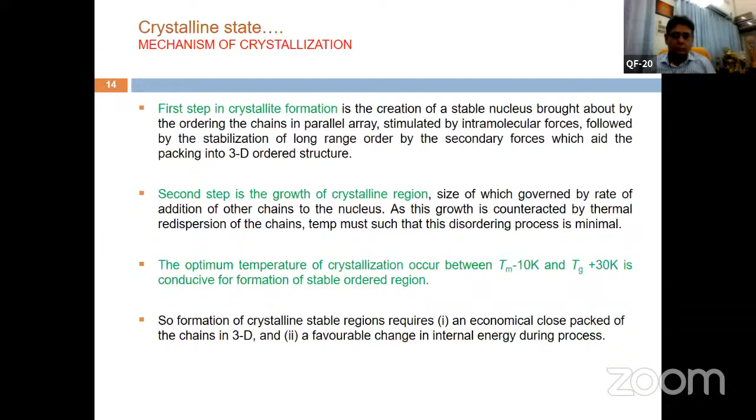Am I audible? Yes, sir. Yes, sir, you are audible, sir. Hello. Hello. Yes, sir, you are audible, sir. Please. And screen is visible? Yes, sir. Screen is visible. Okay. Thank you.

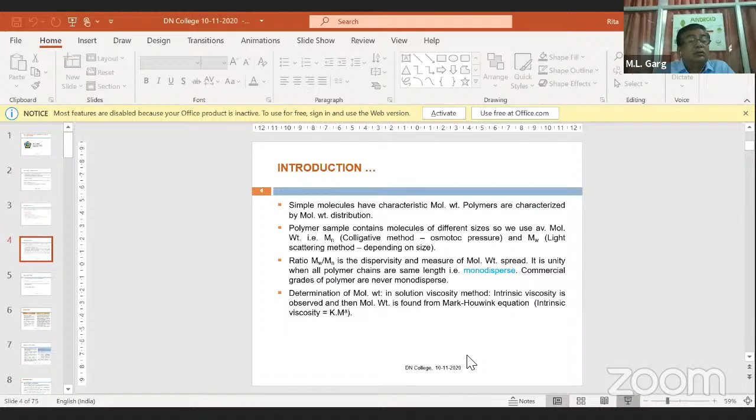Visible, sir. Okay, thank you. Sorry for disturbance. It's okay, sir. No problem. Okay, so we all know that the polymers play an important role for human life. Disturbing. Just wait. Yes.

So all natural polymers, for example cotton, wood, rubber, wool, leather, silk, have been serving humankind for many centuries. And in today's situation, under the COVID-19 pandemic, personal protective equipment is protecting health workers against infection and playing a great role. These polymers are used in the form of gowns, gloves, shields, overalls.

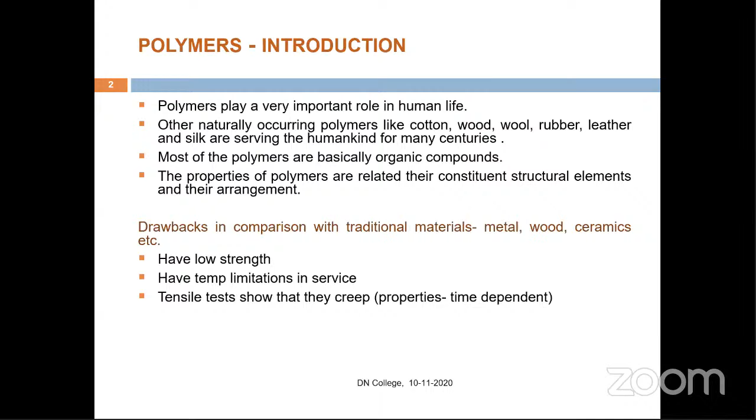And we know that polymers are generally organic compounds and their properties are related to their constituent structural elements and their arrangements. Polymers have drawbacks compared to traditional materials: low strength and temperature limitation in service, particularly low tensile strength for thermoplastics. They also creep, meaning they show time-dependent properties, but they also possess many advantages.

That's why their total volume consumption has increased over other known materials, for example steel, as they are readily moldable, resistant to corrosion, and they are electrical and thermal insulators. Nowadays we can also modify and develop conducting polymers. And the flexibility of polymers is very important; that's why we have rubber in use.

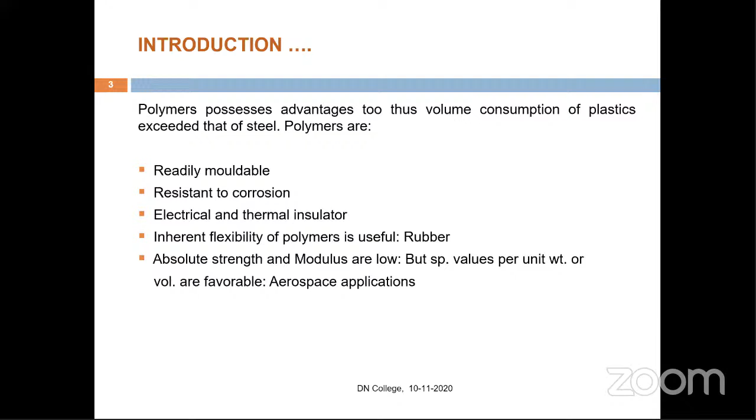Although their absolute strength and modulus are very low, their specific values per unit weight or per unit volume are very favorable, so they have application in the aerospace industry also. They differ from simple molecules in that they don't have an exact molecular weight. Polymers are characterized by molecular weight distribution because they have different chain lengths, grades, and sizes.

So their molecular weights are measured as averages: number average molecular weight, weight average molecular weight, etc. The ratio of weight average to number average molecular weight is known as the dispersity, which shows how their molecular weights are spread. If this ratio is around unity, we call them monodisperse polymers, which rarely occur.

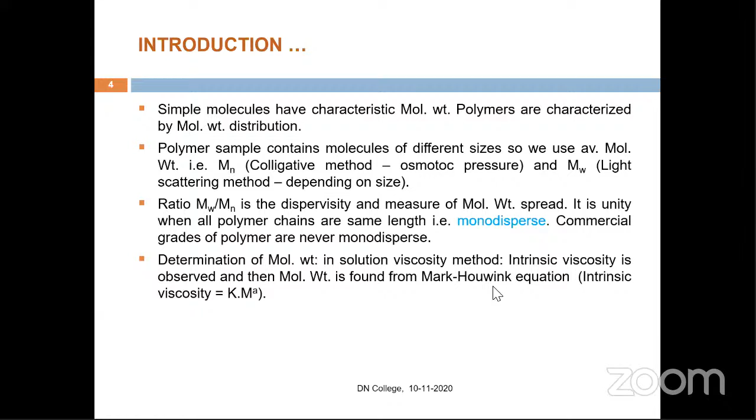Most polymers are not monodisperse; they have a value more than 2. Their molecular weight we can also determine by many methods. The simplest is the viscosity method: relative molecular weight we can determine using the Mark-Houwink equation, a simple expression, using a viscometer.

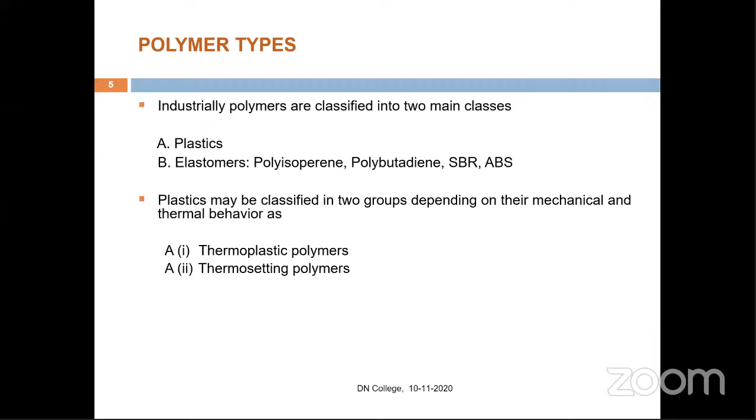Industrially, polymers can be classified mainly into two classes: plastics and elastomers. Plastics can be further classified into thermoplastics and thermosetting polymers. We can also add another class, fibers; some plastics act as fibers also. So basically the main types are plastics, thermoplastics and thermosets.

Sir, am I audible? It is okay?

Yes, sir. Okay. Audible, sir.

So I have taken a table where we can understand some important differences between these two types of polymers, thermoplastics and thermosets. Thermoplastics become soft when heated, and when we cool them again they become hard. So we can process them again and again. So we call them reversible, and we can say repeatable.

And generally we can fabricate many objects, items and products from thermoplastics by heat and pressure. Examples are nylons, polyvinyl chloride, polyethylene, polypropylene, polystyrene. These are the common plastics which are used.

One more important factor is that they have secondary bonds which can be reduced by increasing the temperature. So they have plasticity, and the important point is we can increase their plasticity by increasing the temperature, and by varying the temperature we can accommodate their plasticity. So they are recyclable.

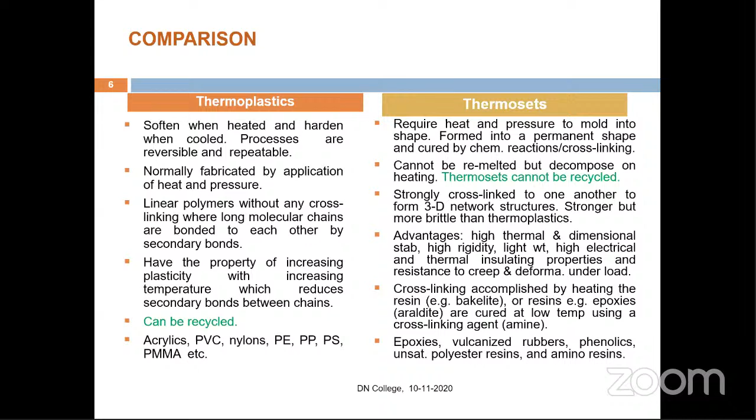So the origins of the polymers are sedimentary geological deposits, which are the origin of crude oil, the origin of synthetic polymers. They are formed from marine organisms. The largest known reserves are in the Middle East, and most of the oil extracted is used as a fuel. Only a small percent of this goes to chemical routes.

So crude oil is generally distilled to separate the fractions, and industry requires predominantly the fractions from carbon 1 to 5, which are obtained by distillation. They are cracked by steam using thermal and catalytic cracking. We have the refinery at Panipat where this process also occurs.

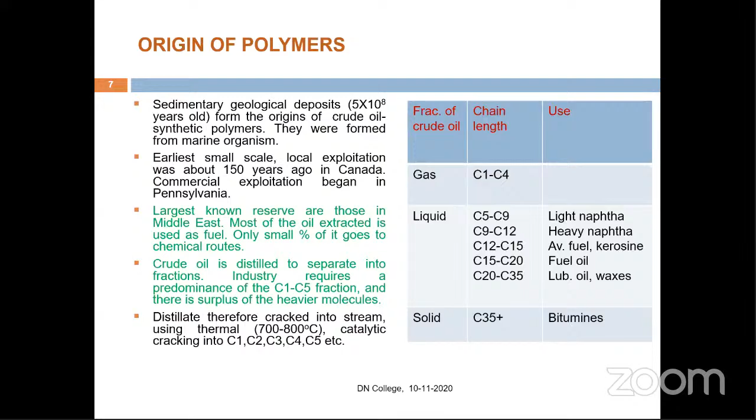And the chemical aspect of polymers, the formation of a polymer, is known as polymerization. Polymerization is a process where monomers are added as repeating units and they form a polymer. So this process we call polymerization.

Initially, the scientist W.H. Carothers gave the classification of polymerization into step-growth polymerization, that is condensation polymerization, and addition polymerization. But later P.J. Flory, the polymer scientist who also got the Nobel Prize, I think around 1974, classified it based on the mechanism, which is more appropriate.

And they have three steps of formation: first initiation, then propagation, then termination. Initiation is done using a common initiator. Benzoyl peroxide is generally used as an initiator.

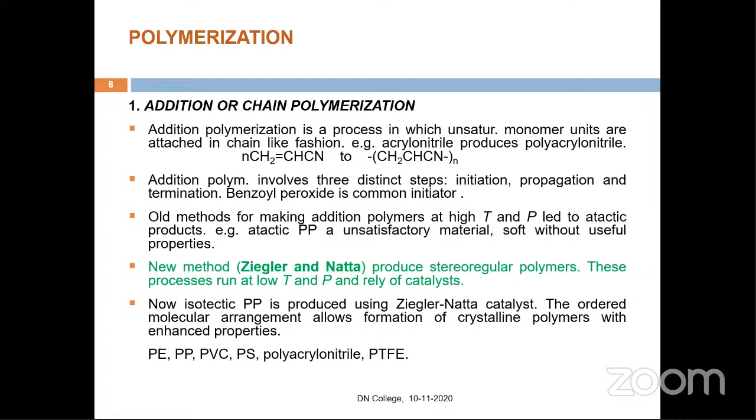So for example, with polypropylene, now we can synthesize very easily the isotactic polypropylene, which has a particular regular symmetry, using the Ziegler-Natta catalyst, and it has so many advantages. Crystallinity of this polymer is increased, so it has many extra properties. So by addition polymerization, polymers such as polyethylene, polypropylene, polyvinyl chloride, polystyrene, and polytetrafluoroethylene can be synthesized.

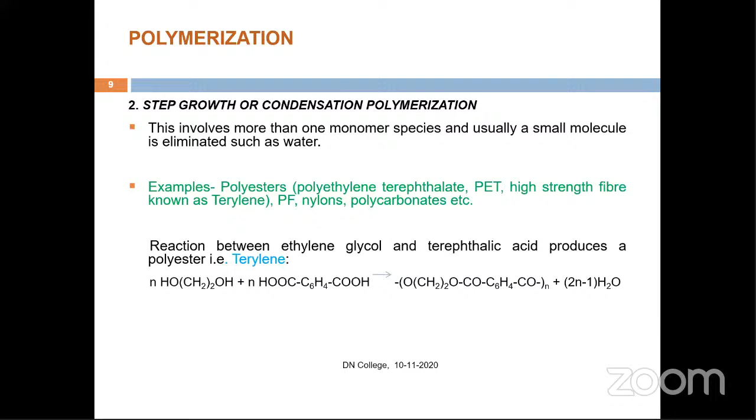Now, their structure and property is also a very important part. The properties of the polymer change in a predictable way as we proceed from gaseous material through liquids to wax. For example, polyethylene up to 100 carbon atoms is a wax, but polyethylene with more than 1000 carbon atoms would be expected to be very hard. But we find that polyethylene is still soft and flexible, and its modulus is also very low.

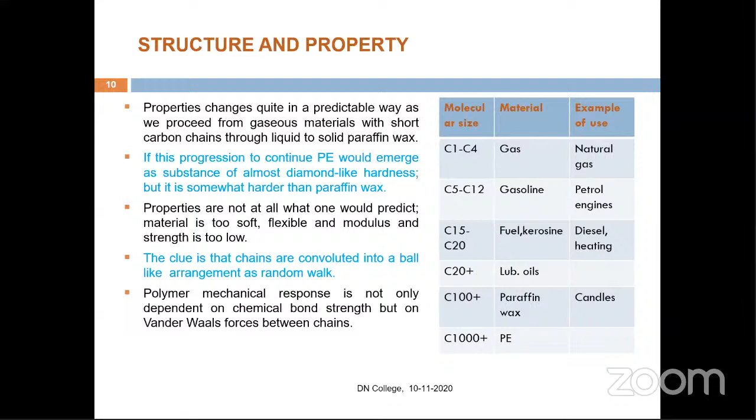The reason is that the polymer chains are convoluted into balls, arranged in random walk type arrangements. And polymer mechanical response depends not only on the chemical bonds but also on secondary bonds, for example van der Waals forces. Before we understand their properties, there are two important states of the polymer. Generally, polymers are found in two states or contain both states.

For example, crystalline polymers. In crystalline polymers, the chains are in order up to a long range, and for crystalline polymers we observe a sharp melting point, not a range. And some polymers are amorphous, where the chains are not arranged in long range order. They don't give a melting point; rather the important property measured is the glass transition temperature, Tg. So this is the melting point, this is the glass transition temperature.

Polymers are not 100% crystalline, nor 100% amorphous. They possess both states, so most polymers are semi-crystalline polymers, which show both glass transition temperature and melting point. Generally, polymers having more than 50% crystallinity we call crystalline polymers, and less than that amorphous polymers.

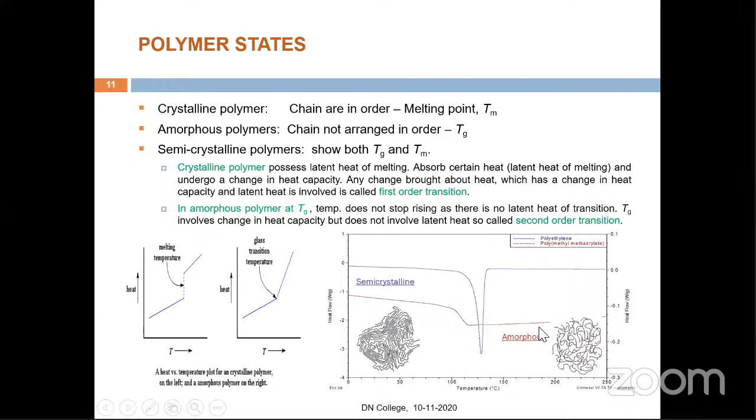So see the semi-crystalline, this is the figure in case of semi-crystalline. These are the crystalline regions, and in between these are the amorphous regions. And see the amorphous one, this is completely random. So these are the pictures we observe. We explain the semi-crystalline and amorphous by these.

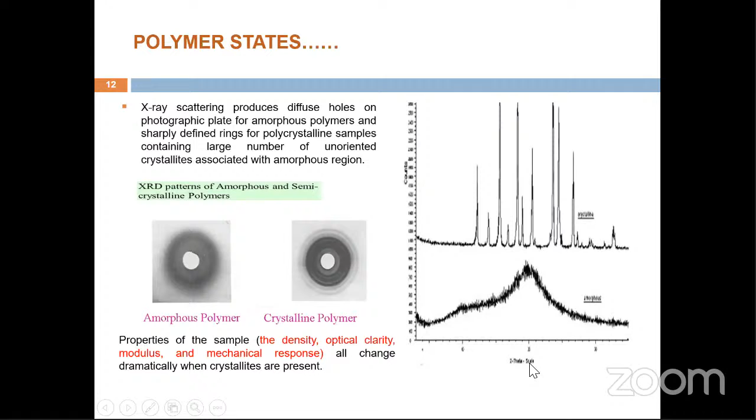And when we take the XRD spectra, we obtain the counts versus the 2 theta angle. In case of crystalline, the different planes have different sharp peaks. In case of amorphous polymers, we have only broad peaks against the 2 theta angle in the XRD.

So there is a mechanism for crystallization. We will discuss more of the crystalline state and amorphous state. These are the important states of the polymer, and because of that, they have different properties. So the mechanism of crystallization, whether they will crystallize or not, why they are crystalline, why they are not crystalline, we can explain by two factors: thermodynamic and kinetic.

So thermodynamically, this is the thermodynamic expression, G is equal to H minus TS. When the polymer is in the melt form, it will attain a state of maximum entropy, consistent with a stable state of minimum free energy. And crystallization, we know, is a process involving orderly arrangement of the chains and is associated with a large negative entropy of activation. So a favorable change in Gibbs free energy is to be obtained for crystal formation.

It should be negative. So the greater the intermolecular forces between chains, the more favorable will be the enthalpy, this H. That's why it will become negative. So from here we can have an indication of which polymer chains will crystallize. For example, two indications: symmetrical chains, which allow regular close packing, essential for the formation of crystallites; and chains possessing groups which increase strong intermolecular interaction, which also stabilize the alignment,

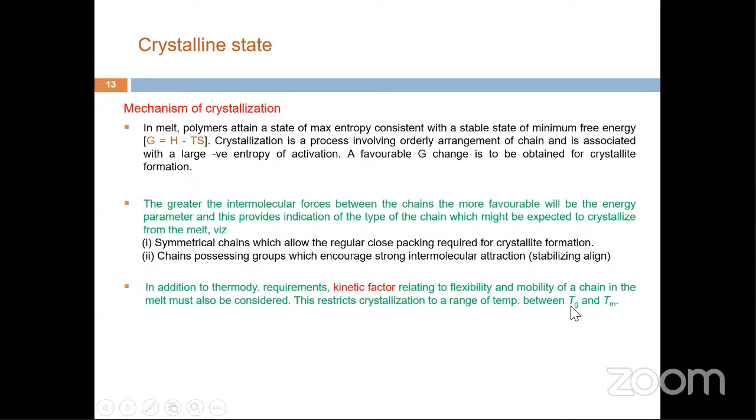and they crystallize. There is also another factor other than the thermodynamic factor, the kinetic factor, which is related to the flexibility and mobility of the chain. That should also be taken into consideration. So crystallization is generally restricted to the temperature range between the glass transition temperature and the melting point. Everything happens between the glass temperature and the melting point of a polymer.

So we consider two steps for understanding the mechanism of crystallization. The first step is formation of a stable nucleus, and then the other chains are brought to it in a parallel array in an ordered way using intermolecular forces. So stabilization takes place up to a long range in three-dimensional order. The second step is the growth, where other chains come and add to the nucleus.

So there the temperature has its role. Generally the optimum temperature for crystallization is between 10 degrees centigrade less than the melting point and 30 degrees centigrade higher than the glass temperature. So we have narrowed the temperature range where we see crystallization occurring. For formation of a stable crystalline region, we require economical close packing of chains in 3 dimensions and a favorable change in internal energy during the process.

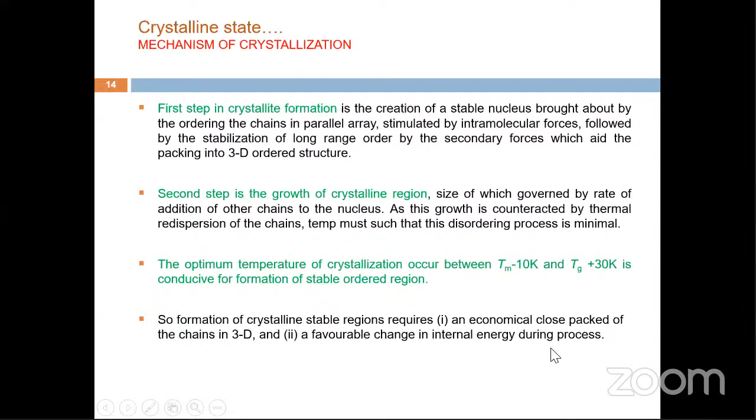We also see some factors which affect the crystallinity and of course the melting point. What are the factors? Symmetry, intermolecular bonding, tacticity, branching, and molar mass. Let us take a simple example. In case of symmetry, let us take polyethylene and polytetrafluoroethylene.

These are symmetrical ones, and we consider them smooth cylindrical rods. These rods tend to roll over each other and change their position when thermally agitated initially. This is called pre-melting. That's why pre-melting is important in most polymer processing. Before processing, we heat a little bit for some time, then we process them in the processing machine.

So what happens in the pre-melting, which increases the entropy of the crystal and effectively stabilizes it. So more thermal energy is needed before the crystal becomes unstable. So the melting point is increased. More symmetry, more packing, so more crystallinity, so more heat is required, so the melting point increases.

So we have some examples. For example, these are the three examples. The cis double bond, ortho/meta phenylene group, cis-oriented puckered ring, they all increase the bending and twisting of the chains. They don't allow setting the chain in close packing, so there is difficulty. So that's why they are less crystalline, and their melting point will be low.

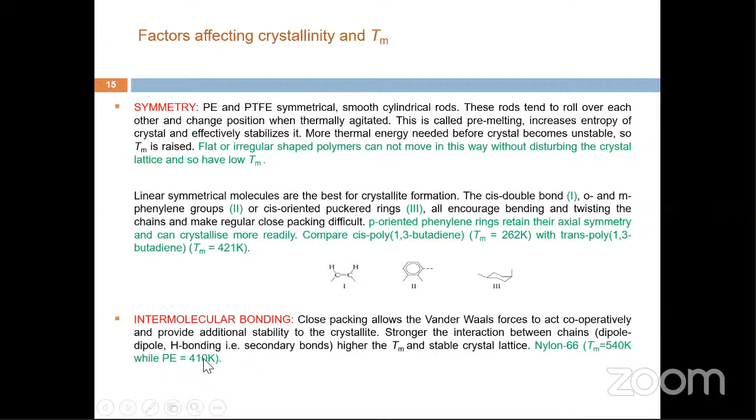Tacticity: the isotactic polymers form the helix. For example, polypropylene forms the 3-1 helix. The helix means they are stabilized. They take such a conformation which is more stable, and their packing is better. So they become stabilized.

Take the example of polystyrene. When it is atactic, it is amorphous. When it is isotactic, it is semicrystalline. So in the case of isotactic configuration, it forms the helix. So close packing, so crystallinity increases. Otherwise, atactic means random symmetry, so in that case the amorphous polymer is present.

Branching also affects it: if the chain is branched, packing efficiency decreases and crystal content is lower. Okay. For example, branching in side groups stiffens the chain, so it raises the melting point also. So molar mass also affects the crystallinity, and molar mass means the length of the chain or molecular weight, how it affects the crystallinity and melting point.

Because if we have low molecular weight, it means we have smaller chain length, so we have many ends in the polymer. The chain ends are relatively free to move. So many ends are there, so they are free to move. So the number of chain ends increases, reducing the molar mass. So the melting point is lower.

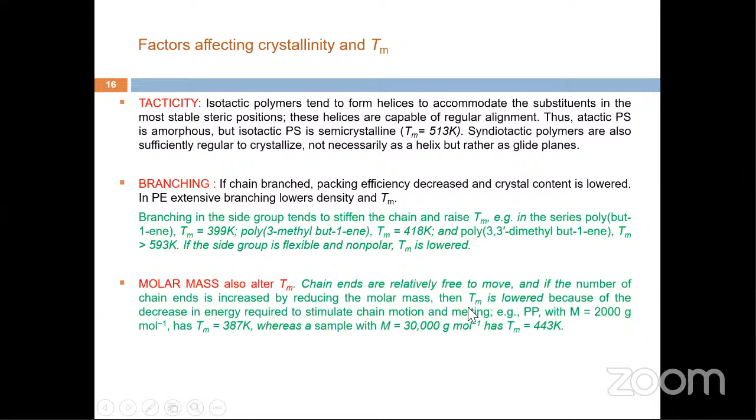Take an example of polypropylene of molecular weight 2000. It has melting point 387 Kelvin, and if we increase it to 30,000, the melting point increases up to 443. So the same kind of polymer of different molecular weights has different melting points. So we must know all that, and similarly the crystallinity also changes.

So another state, that is the amorphous state. The important concept we must remember in the case of the amorphous state is the molecular motion. When we talk about the amorphous state, we must always point to the molecular motion, and the molecular motion depends upon the flexibility and the temperature.

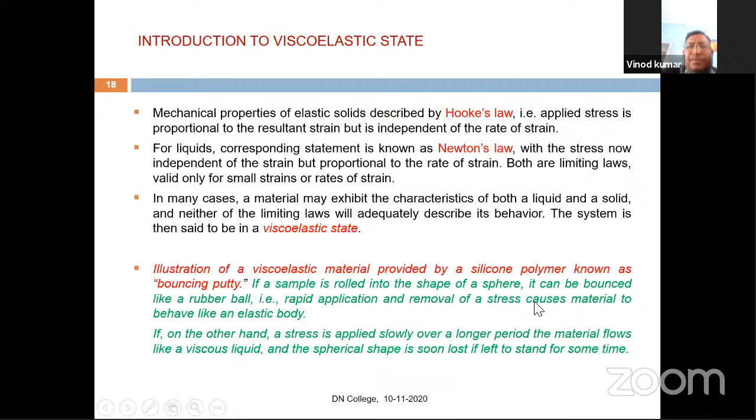We can understand the viscoelastic state by taking the example of silicone polymer, which we sometimes call bouncing putty. If we take a sample of it and roll it into a sphere, it will bounce like a ball when stress is applied rapidly. But when the stress is applied slowly, it will not bounce, it will deform. The material will flow like a viscous liquid.

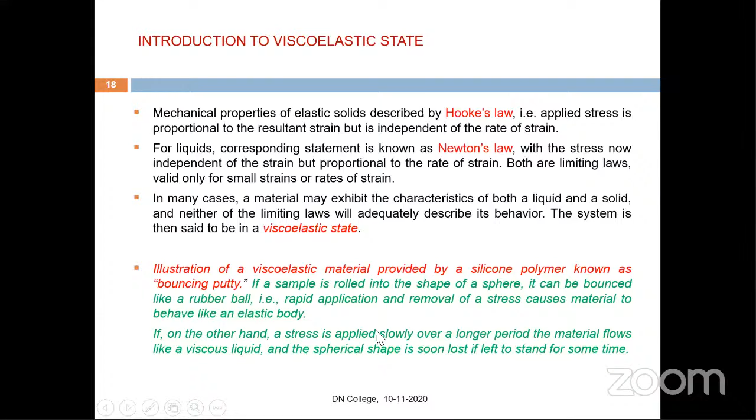So the viscoelastic state is totally different. Depending on how the load and stress are applied, the behavior is different. So we must know how the polymer behaves in this state. And the chain length, or molecular weight, affects the property, because different polymers have different grades and different molecular weights, so it's important.

We can understand the effect of chain length by measuring the viscosity. This is called the zero shear viscosity. Zero shear viscosity means the viscosity at the shear where it follows Newton's law, so that is the zero shear rate viscosity.

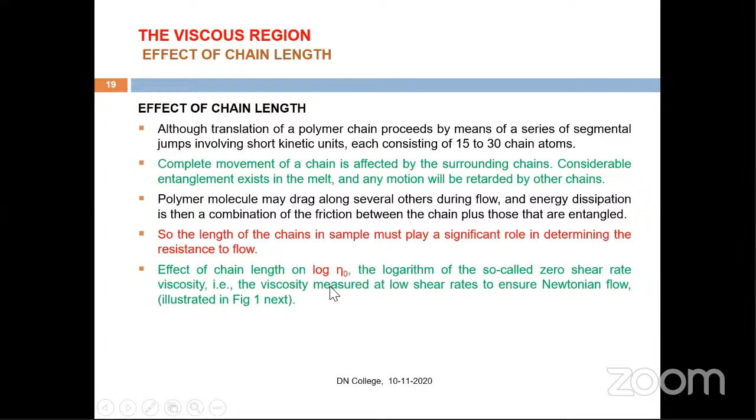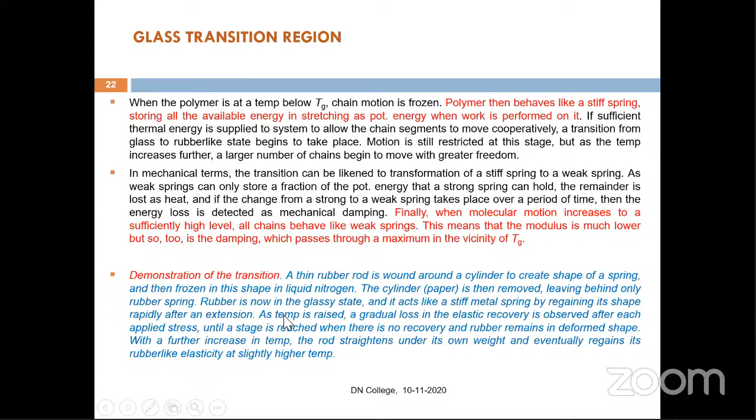slide over each other. Generally we see in new cars, the dashboard, etc., that smells. That is because of the plasticizer present there. Plasticizer is added there so that the glass temperature does not increase. It doesn't become brittle. If all plasticizer is evaporated with time, then the dashboard will become brittle. So plasticizers are added to have the appropriate value of the glass transition temperature. For example, phthalate esters are added there. So glass temperature is very important.

Okay, so the molecular motions, those are important before the transition, after the transition. The molecular motions are there, but they are frozen below the glass temperature. Above the glass temperature, toward the rubbery state, the molecular motions are allowed. So it doesn't mean there is no motion. They have the ability, but they are frozen, like they hold their own potential energy, like a strong spring.

When we use it many times, it becomes loose, meaning now it doesn't hold the potential energy. So their motions are there in a frozen state. Okay, all the energy they have absorbed as potential energy. So that's the important case.

For example, take the case of polyisoprene. Take the rubber, that is polyisoprene, that is natural rubber. It is a flexible chain, and this is room temperature, 300 Kelvin. So it behaves as rubber because the chain of polyisoprene can have many conformations, 1,000 conformations within a second. So it's so flexible at room temperature.

And its glass transition temperature is around minus 70, 80, around minus 100 degrees centigrade for rubber. So at room temperature, polyisoprene behaves as rubber because the chain can have so many conformations at room temperature within a second. So it behaves as a rubber. So it's an elastomer, a good elastomer.

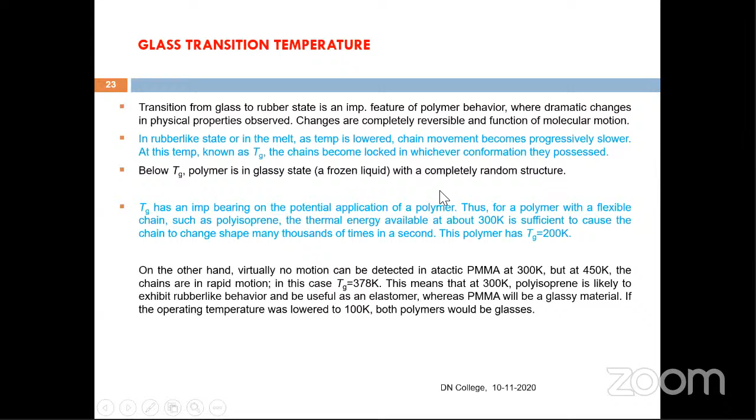So generally at the glass transition temperature, most of the properties, for example the specific volume, the modulus, the heat capacity, refractive index, and many other physical properties, also change abruptly. So they are different below and above the Tg. For example, you measure the volume or the enthalpy or the entropy when you increase the temperature. You will find this kind of curve.

And in case of crystalline one, and in case of amorphous, you see the continuous increase. So when we extend these two linear portions, we get the intersection, and from there we measure the glass temperature. So generally we take the first derivative of these, the derivative of H.

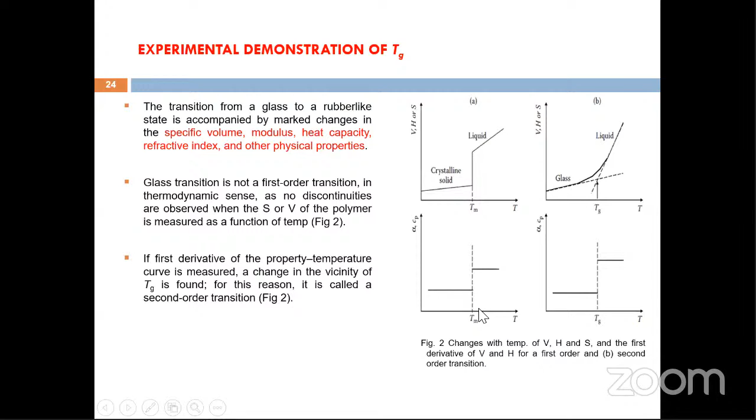So we can see the heat capacity and how the heat capacity changes, and heat capacity we can measure from DSC, differential scanning calorimetry. Similarly here, we can measure this in differential scanning calorimetry. We have the endotherm in case of melting point, and here a deviation in case of glass temperature.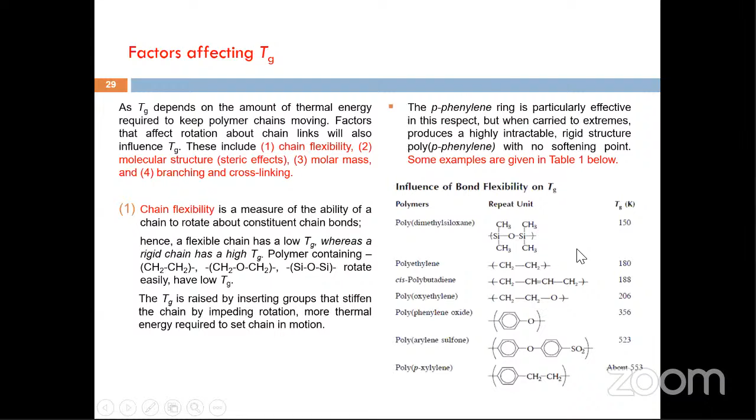So generally, the polymers containing these simple chains are easy to rotate, so they have the low TG. As aromatic rings are added there, their TG increases, so it is difficult to rotate. So this is an example that with the increase of the hindrance in the backbone of the chain, rotation is not easy. So the movement is not easy. So we have to give more energy to make the motion, to make it flexible. So TG is increasing. So this is one table where we can see. This is another table.

Is it visible? Dr. Garg, visible है table? Garg साहब? Sir, visible है sir. Okay.

See here, this is another. So in this type of polymer, this is, for example, X. So the X group changes. So this is the group X in polyethylene, polypropylene, polybutene, pentene, hexene, then 4-methyl, then alcohol, then polar ones, vinyl alcohol, vinyl chloride. See the value of X. So the molar volume increases, and TG also increases with the increase of the hindrance of this group.

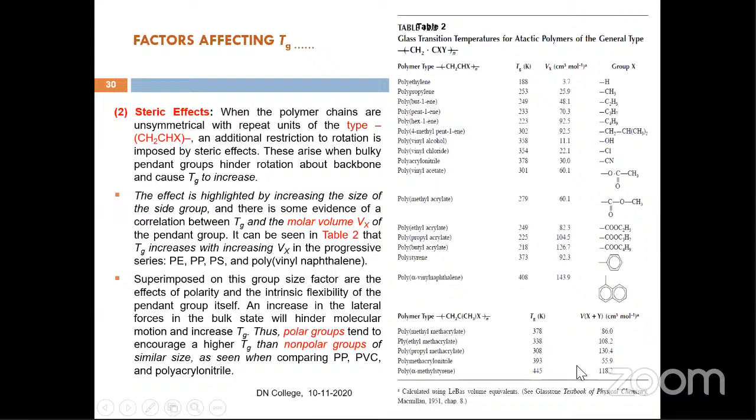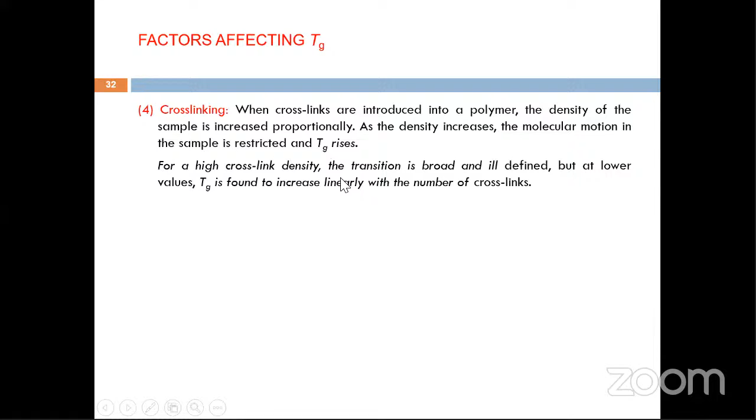So creep is very important. What is the meaning of creep? It is related to dimensional stability. So polymer material must retain the shape when we subject it to tension or compression. So thermosets, for example, epoxy, are set by cross-linking, so they don't creep. For example, a plastic telephone receiver that sags after sitting on a cradle for several weeks is no use. Car tires that develop flat spots if parked in one position are no use.

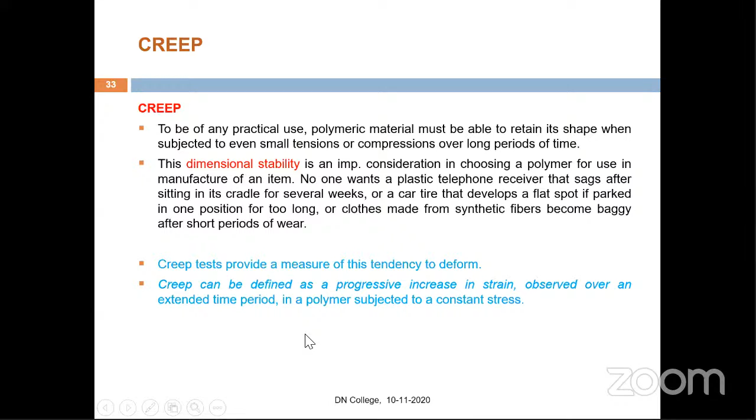If clothes made of synthetic fiber become baggy after a short period of wear, there is no use. So dimensional stability should be there in the fibers. So we must know what is the dimensional stability, what is the creep behavior of a polymer; only then can we use the fiber for applications. So creep test we generally do, that is the tendency to deform.

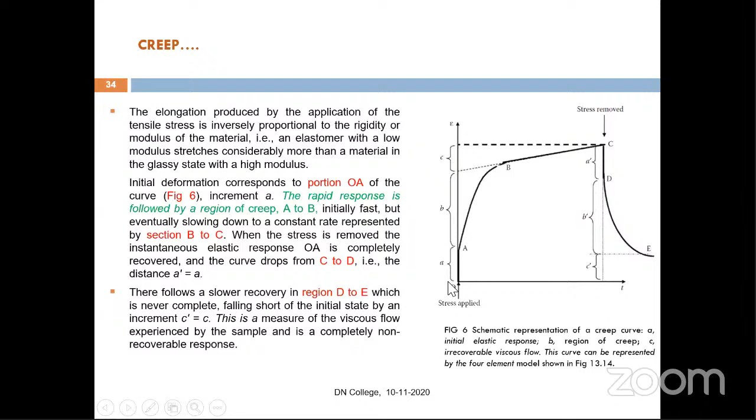Here is another diagram. When stress is applied, how the strain takes place. This is the first, the rapid response. Then this is where creep takes place, and then this is the plasticity and the elongation. Then stress is removed, and how it comes back in a similar or different way. In case of elastomer, a dash, these values are equal. If it has less plasticity, less elastomeric, then these values are different. So this is the creep curve.

We can have much understanding from the stress-strain measurement: the elongation at break, whether the polymer will fracture or not. So this is the tensile strength tester curve; this way we obtain this curve. In case of brittle polymers, they will break here. From the area under this curve, we can measure the energy required. If it is elastomer, there will be a yield point, and a curve like this is obtained; it will break here. So more energy is required to break, long elongation. So generally fibers behave like this and elastomers behave like this. Okay.

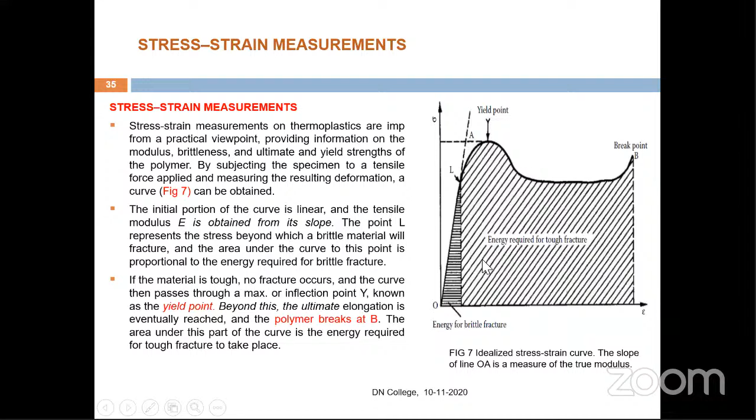Now let's generalize the structure-property relations and why they are important. There is increasing use of synthetic polymers by industrialists and engineers to replace and supplement more traditional materials. So we need to search for a versatile polymer structure covering a wide range of properties. So we must have fundamental knowledge of structure-property relations. Only if we know what the structure is and what the property will become, only then can we develop and search for the required polymeric material.

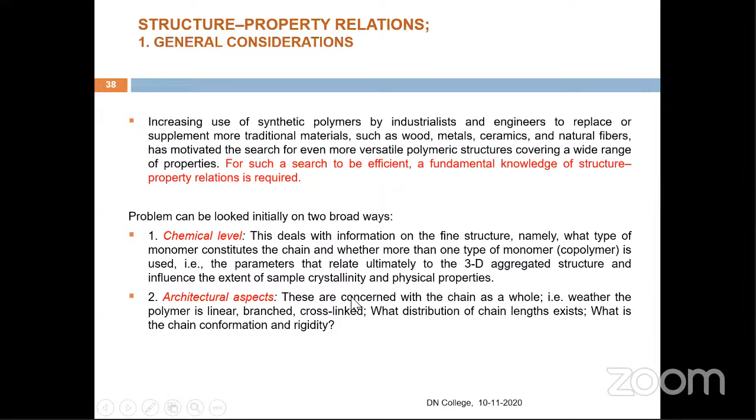So in a broad way, again, there are two ways we can look at the polymer if we want to develop or modify a polymer with our required property: the chemical way and the architectural aspect. In the chemical way, we want to know what monomers the polymer chain consists of, what type of monomer is there, what type of copolymer is there, what parameters are related to that, whether aggregation or a three-dimensional structure is there, and whether the polymer chain is linear, branched or cross-linked. If we know everything and how they behave with each other, only then can we try to develop a polymer with our

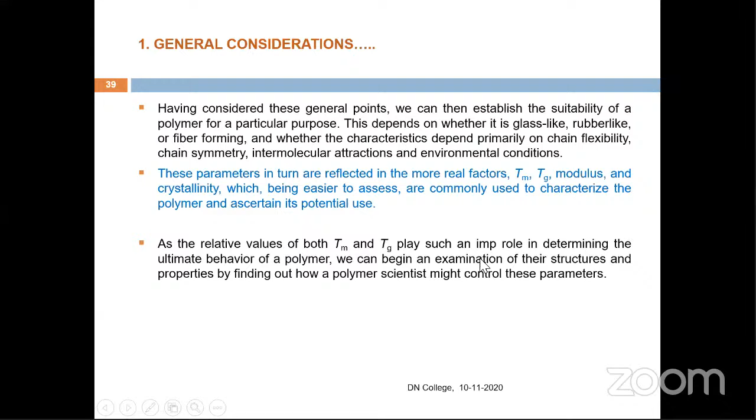appropriate properties. So these are the two basic parameters, melting point and glass temperature. They play an important role in determining the ultimate behavior of the polymer. Okay, so we can examine them. See, these are the two tables where we can again examine the structure of a polymer. See this: polyethylene, polyester, polycarbonate, polyether, polyamide. These are the different types of polymer. See, these are the groups: the ester, ether, and oxy.

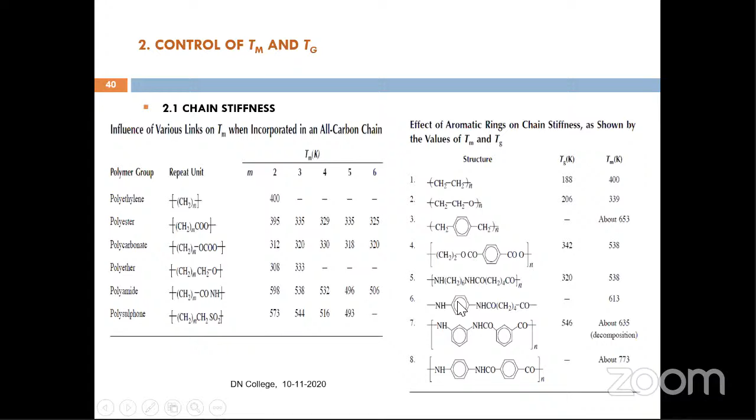The influence of chain symmetry is also noticeable when comparing the decomposition temperature of an unsymmetrical chain, and this is the decomposition temperature. This is unsymmetrical, this is symmetrical. The symmetrical one has a higher decomposition temperature; it has more thermal stability than the unsymmetrical one. So we must know the structure, the monomer, what kind of chain is there, what hindrances are there, what kind of forces are possible there, so we can modify the polymer structure accordingly.

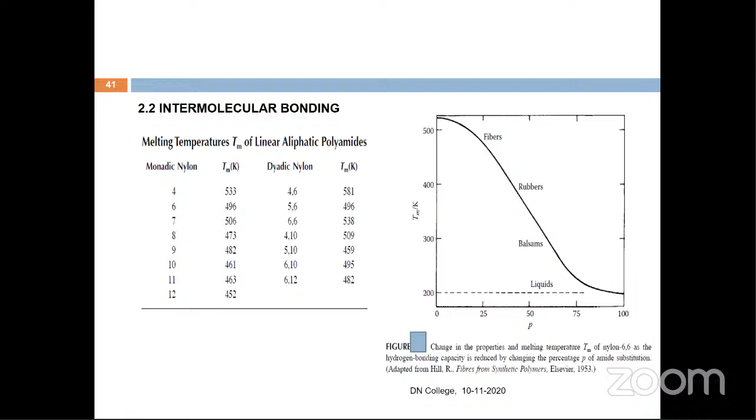So the secondary force is also very important. From nylon 66, whether you want fiber or rubber or other viscous types of material, you have to see the secondary forces. So you have to change the chemical composition: the hydrogen atom is to be replaced by another group.

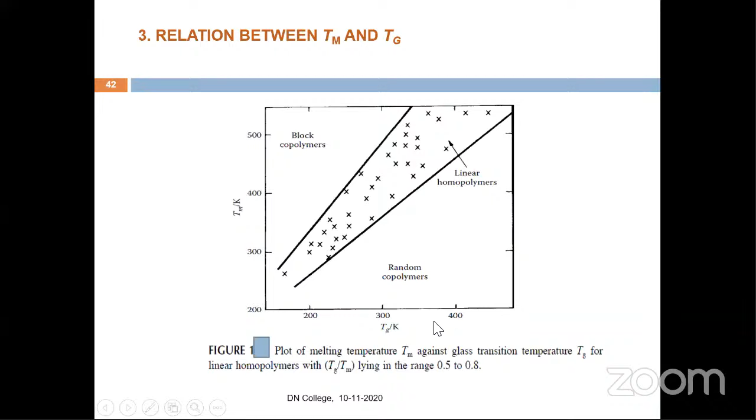The point is, if we want to develop a polymer with different desirable properties, we have to prepare the copolymer. That means more than one type of monomer is polymerized to form the copolymer, so that we can obtain the desirable Tg and desirable melting point. So it leads to the formation of the copolymer. So from here we can have the idea how it changes. So, most of the polymers you come across now... now let's come a little bit to the application part.

How much more time can I take? Garag Sahab?

Hello? Yes, sir, you are audible. Yes, how much time is left? Can I take 2-3 minutes more? Yes, you can take. Sir, you can continue. Okay, okay. So I will be taking just 5 minutes more and I will be finishing it.

So, for example, I have given a table here where the most common polymers are listed with their characteristics and their applications, so you can have some idea. For example, polyethylene is more flexible. So flexible bottles, toys, tumblers, battery parts, ice trays, wrapping materials: polyethylene is used for these.

Polypropylene is somewhat harder than that, so it resists distortion. It has excellent electrical properties, fatigue strength and is chemically inert. It is inexpensive, although it has poor resistance to UV. So for sterilizable bottles, which have to be heated to sterilize, polypropylene is taken. Also packaging film, TV cabinets and luggage, the rough, hard ones, use polypropylene.

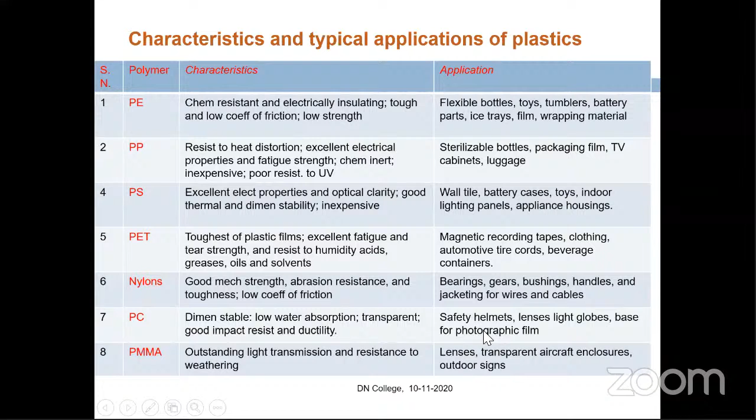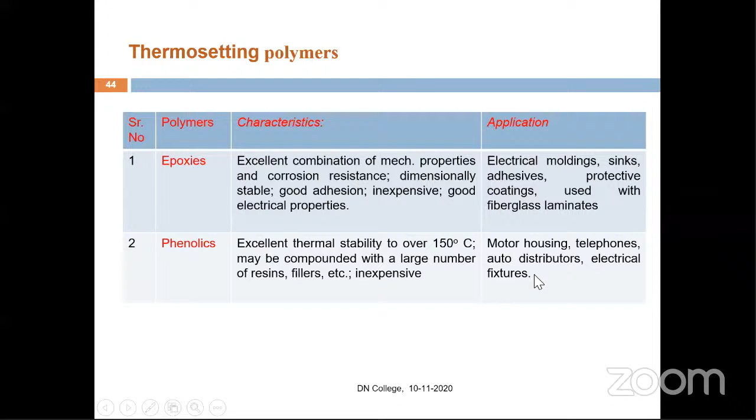Phenolics are used in telephones, the colored ones, and electrical fixtures; Bakelite is phenol formaldehyde. You know Bakelite, it also has excellent properties. Melamine formaldehyde: there was a time when all utensils were melamine formaldehyde, the white ones, while the brown and black ones are phenolics. Many adhesives are epoxies, like Araldite. So they have many applications.

So there should always be innovation, and that's why we have new applications. Plastic material growth depends upon innovation; only if they have applications do they grow. We have many innovations in plastics, in transport and defense, aerospace, medical, healthcare, and electronics. Polymer electronics is one area that has opened new avenues: organic light emitting diodes, electro-optical and bioelectrical components, low-cost plastic chips to flexible solar cells.

These are new areas, and new plastics conduct electricity, like polyacetylenes. These are conducting polymers. They conduct electricity and emit light. Although we cannot replace silicon-type semiconductors, we can approach that. Radio frequency identification tags used nowadays are all plastic, for access control, payment, tickets, price tags, everything.

And now the medical applications of polymers are very important. As I said earlier, we are not talking about polymer waste being useless; that depends upon waste management. Even a simple layman can understand how they have helped in today's COVID-19 situation. All protective equipment is made of polymers, for example gloves, made of nitrile rubber, natural rubber, polychloroprene.

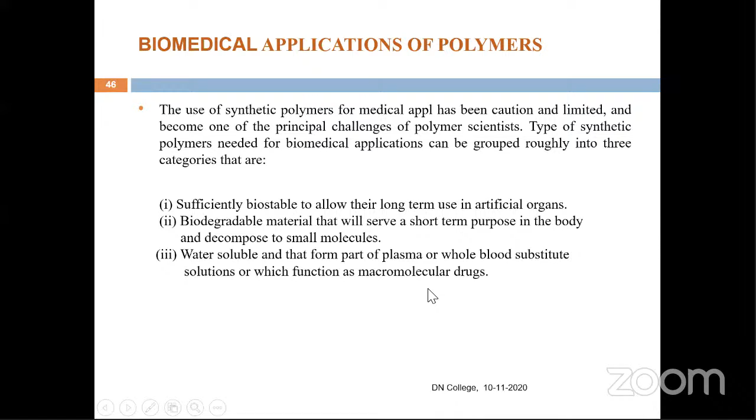They have other important applications where we must be very careful about the use of polymers in medical applications. Roughly we divide these biomedical applications into three groups: materials that are sufficiently biostable to allow their long-term use in artificial organs, and biodegradable materials that serve a short-term purpose and decompose to small molecules, which are excreted from the body, and some water soluble ones used as membranes for dialysis. So we can classify all the medical applications of polymers.

Polymers for heart pumps and cardiopulmonary bypass surgery, the artificial heart pumps: silicone rubber is used, polyurethane rubber, Dacron polyester, Teflon. They have so many applications. Heart valves use polytetrafluoroethylene. Prostheses, artificial limbs, are made up of PET fiber, polytetrafluoroethylene foam, porous polyethylene foam, silicone rubber. So they are used there as medical applications.

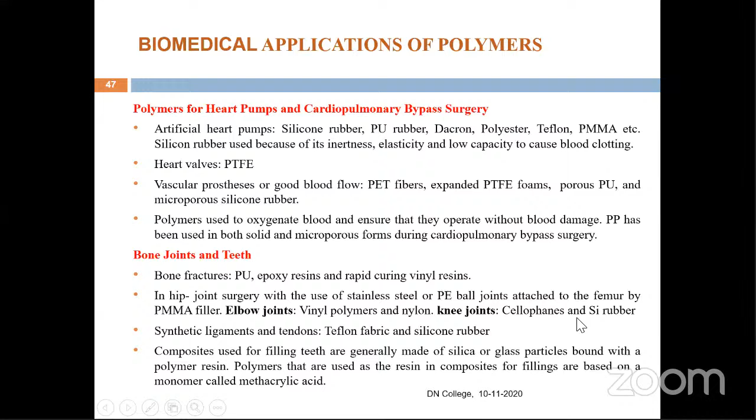And bone joints and teeth: elbow joints, knee joints use silicone rubbers, elbow joints, vinyl polymers; ligaments use Teflon fabric, silicone rubber. Then there are contact lenses: polymethyl methacrylate is used for hard contact lenses, and for soft contact lenses we use hydrogels, and there are many other surgical applications.

Most important nowadays, scientists are working in drug delivery. That is an important area where drug delivery carriers are based on natural and synthetic polymers. They take advantage of the mechanism used by pathogens and other cells for selective targeting. Although I am not a person from a medical background, I tried my best to explain the structure-property relations and their importance in the development of copolymers.